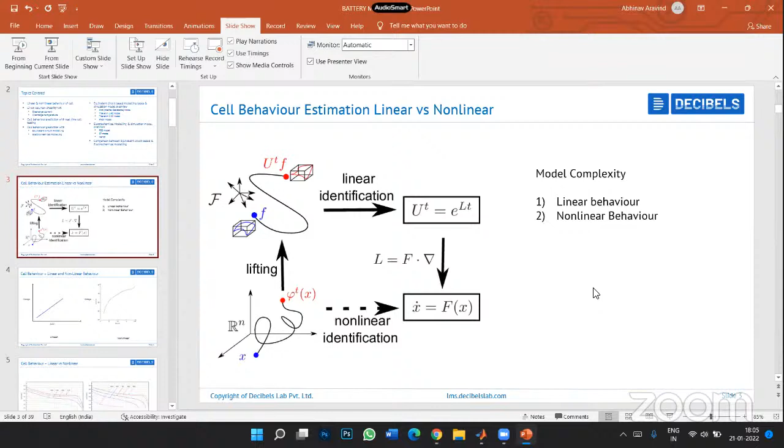So comparing these two, obviously we can say that it is more tough, more complex to have an in-depth understanding of the nonlinear behavior of the system, which requires some more complex modeling approaches.

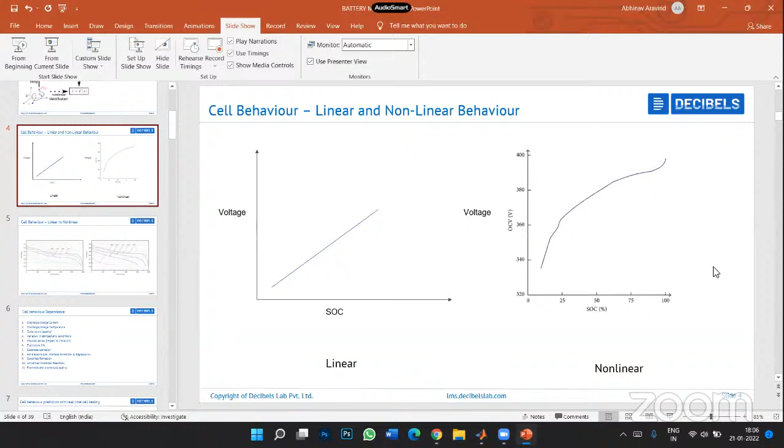Now, also taking into account some of the relationship between parameters and some of the other situations that we have, such as the effect of discharge and charging current and discharge and charging temperature on the chemical reactions that occur within the cell, and also when we try to analyze the cycle count. So cycle count is basically the charge and discharge cycle. So once you charge it and then discharge it, that's one complete cycle. So analyzing this and trying to see what effect it has on the chemical reactions within the cell is really important. It has to be accounted for when you're trying to analyze the complete behavior.

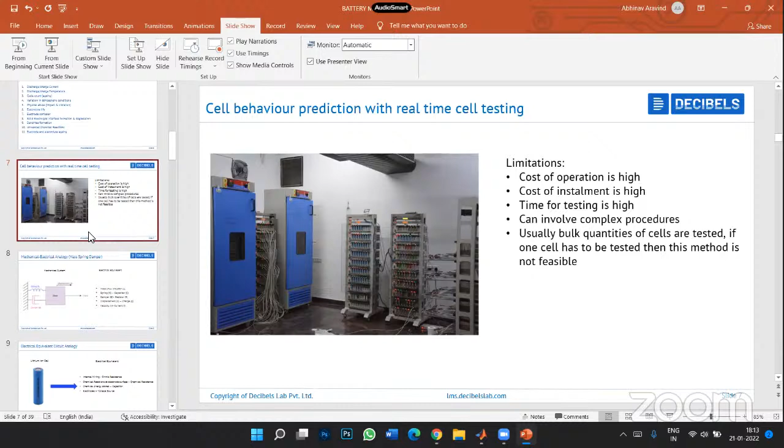So similar to this analogy, we can establish an analogy between the lithium-ion cell, the internal components of the lithium-ion cell, and its electrical equivalent. When we talk about the internal components, we start with internal wiring, which can be represented as an ohmic resistance. The chemical reactions that occur at the electrodes can be represented as chemical resistance. And then we have the chemical energy stored within the cell, and that can be represented as the capacitor.

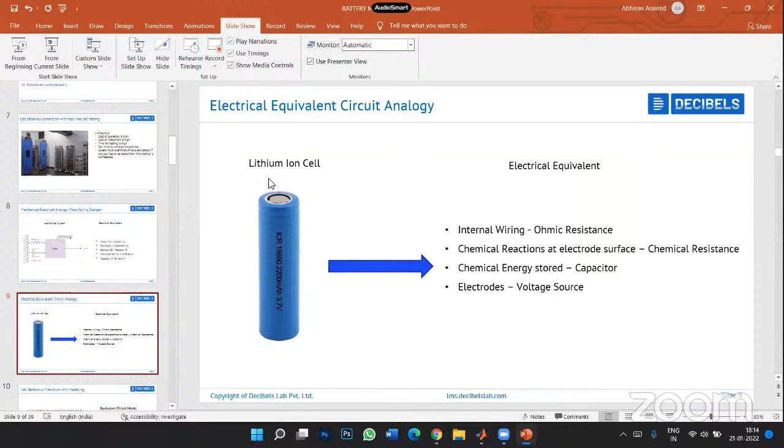And then we have the electrodes. The electrodes act as the voltage source or the voltage supply. So from this, we can get a basic understanding of how electrical equivalent modeling is done when we look at a lithium-ion cell.

So in the equivalent circuit part of the approach, I will be introducing the RINT model, also called the internal resistance model, and then the Thevenin 1 RC model, which is based on Thevenin's equivalent circuit approach.

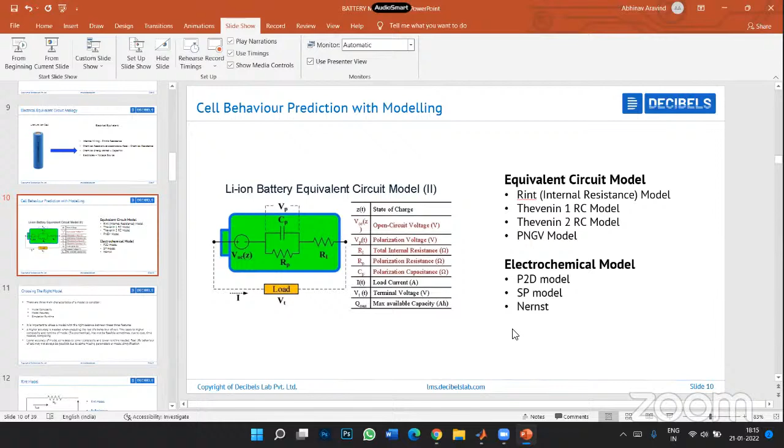Now, to understand how we approach this particular method, we first have to understand how we choose the right model for understanding the behavior of the cell. Whenever we try to choose a model, there are three characteristics that we have to consider. The first one is the model complexity, the second is the model accuracy, and the third is the simulation runtime. All three are interdependent, and it is very important to choose a model with a good balance between these three features.

So let's consider a scenario where you require a very high accuracy. Higher accuracy means that you're trying to represent the real-life behavior of the cell. So if you have high accuracy, your complexity also increases, and so does your simulation time.

That's the disadvantage: while it is very accurate, building the model and analyzing it becomes very complex, because the accuracy involves many equations and a lot of parameterization. It will also involve a lot of cost and time to build, and its complexity is very high. It may not be feasible in all situations, but the main advantage is that it can represent the actual real-life behavior of the cell.

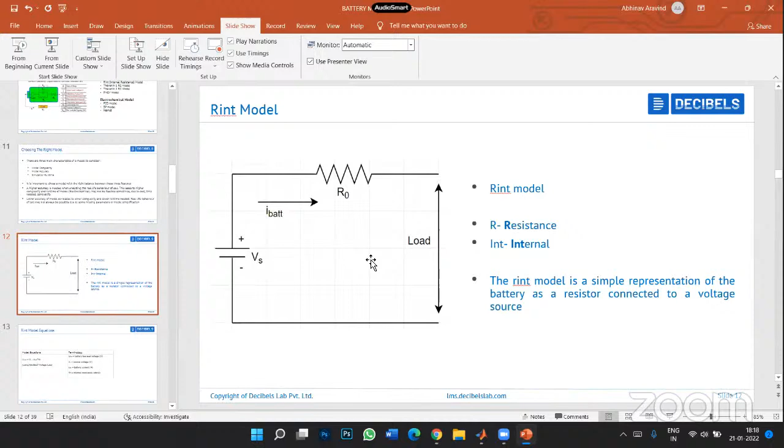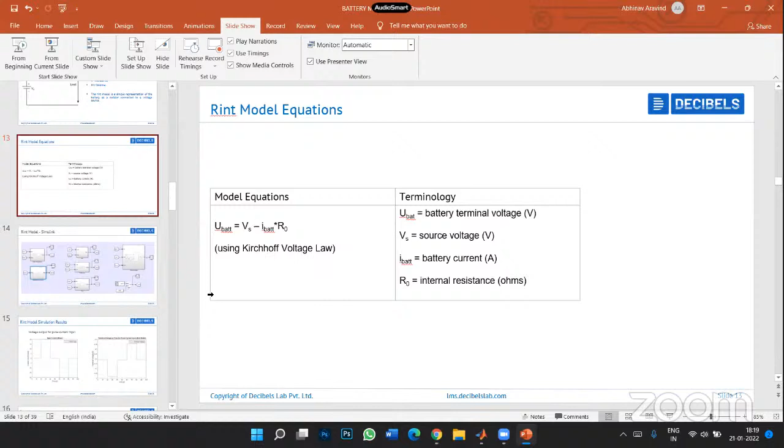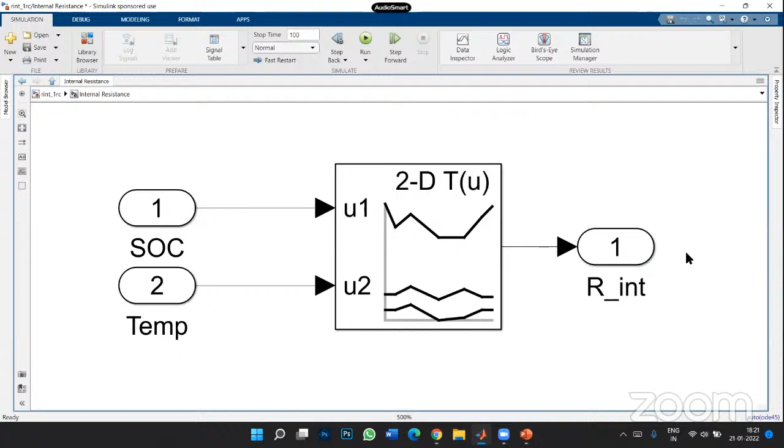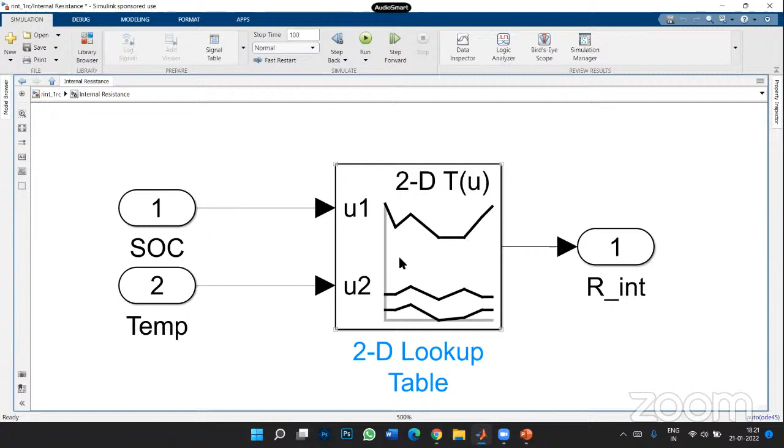When we go into the internal resistance block, here we have what is called a lookup table. The lookup table is basically a table used to establish a relationship between two parameters. For example, if I provide a parameter input here, then corresponding to it, I have an output parameter here. This kind of approach is what we call a data-driven approach. Using these lookup tables, we have modeled the complete relationship between all of the parameters, and then we are able to get the full behavior of the cell.

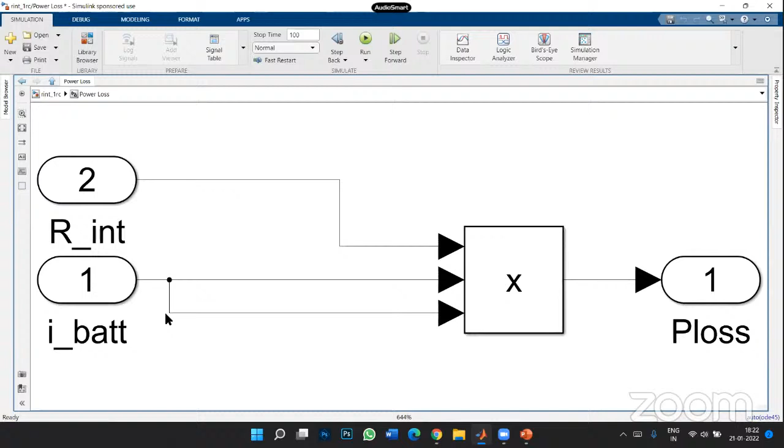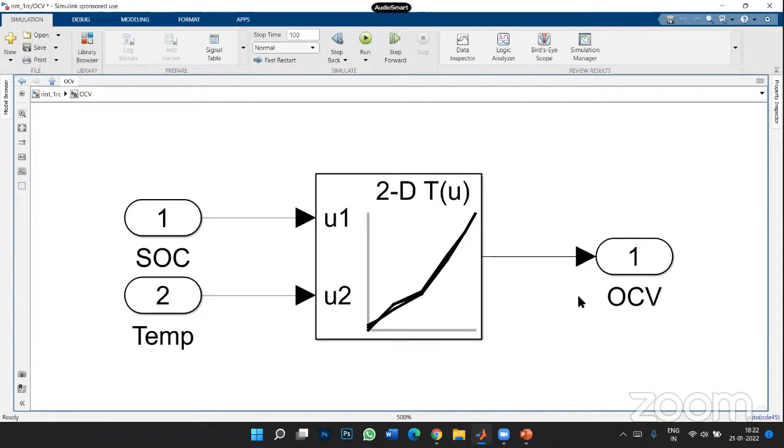Here we modeled the power loss based on the estimated internal resistance. The power loss is basically based on ohmic losses, I squared R, so we are able to estimate the power loss using the internal resistance. Then we also have the open circuit voltage, which is the main branch voltage of the entire circuit. Even in this case, we can see the use of a lookup table, with the inputs of temperature and the estimated state of charge, and the output as the open circuit voltage.

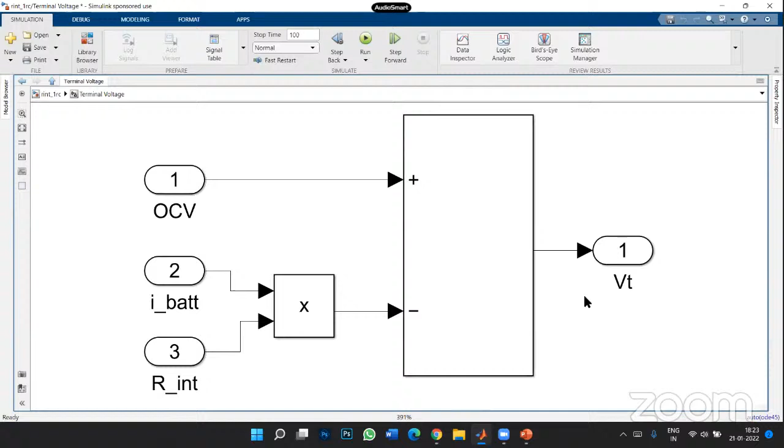And then finally, since all of these blocks are interrelated and interdependent, when we get the output from all of these blocks, we are able to establish the final equation of the terminal voltage, which is over here, which we derived using Kirchhoff's Voltage Law, as we had seen in the presentation. So the final output here is the circuit voltage, the terminal voltage we see here.

And on this part of the model, we can see the inputs that can be used. The entire model uses one input, which is the battery current, and has one output, which is the terminal voltage. So this is just a brief overview of the Simulink model of the RINT model.

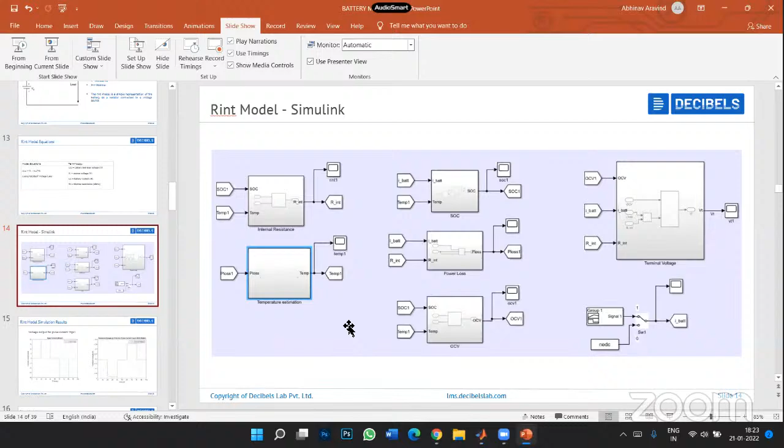And let's have a look at the results that we get when we perform a pulse current input to this. This pulse current input is basically just a simple discharge current and then a charge pulse current that we have given to the entire model. It's basically a linear input, a pulse charge and then a pulse discharge, just to see how the voltage would be at the terminals of the entire model.

Now when we discuss the advantages of this particular model, this is a simple and linear representation. It involves one equation that represents the entire system with very few variables, which means it's pretty simple to build this model using that one equation. So these are the main advantages, and the simulation time required is really low.

But the main disadvantage of this particular model is that it can only represent the linear behavior of the battery. It cannot be used for representing the nonlinear behavior, which leads to low accuracy in the final interpretation. And it also cannot be used in dynamic situations, because it's a linear representation. So that's a basic overview of the RINT model.

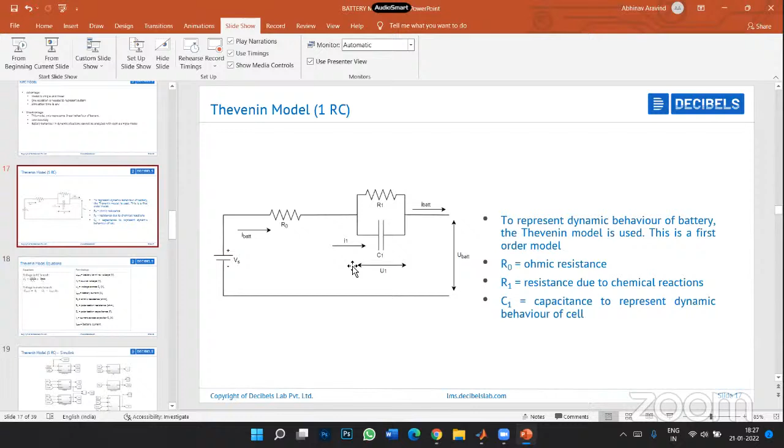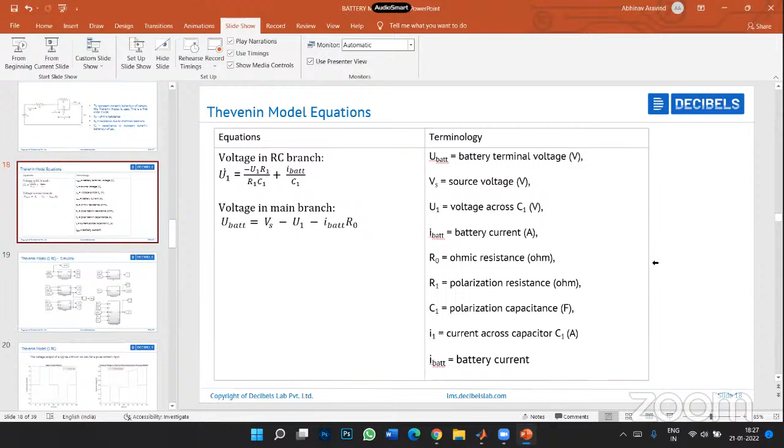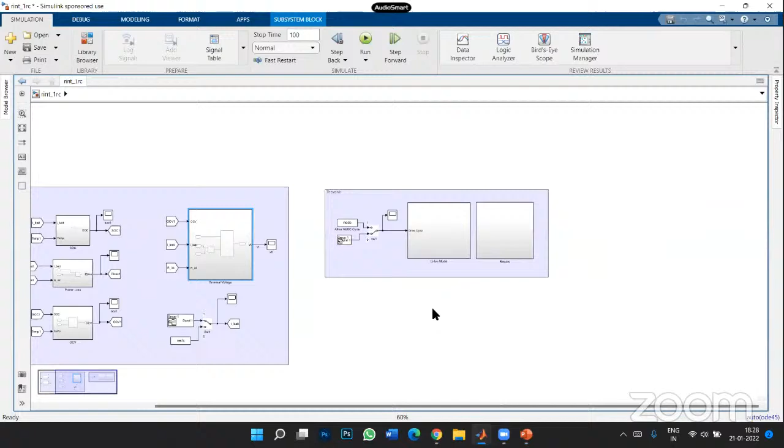And there is a model for this in Simulink. Let me show that in the Simulink environment. So this is the Thevenin model, 1RC model. Here we can see that it's a bit more complex, where we have established more complex relationships between each of the parameters to try to represent how it would behave in real life.

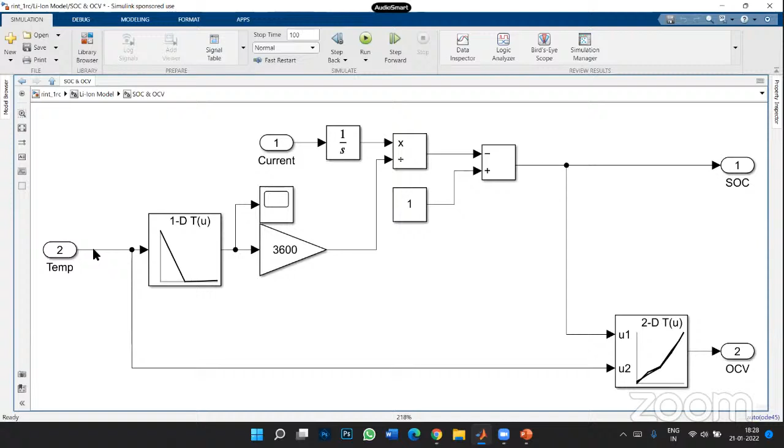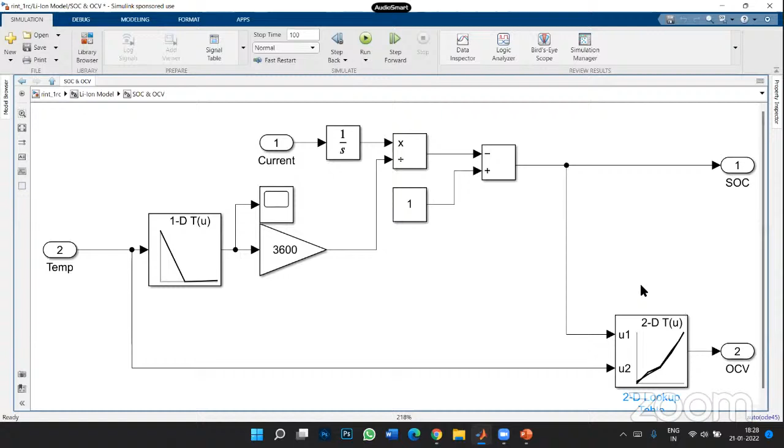For example, we can see here the more complex relationship between the temperature and the open circuit voltage. In the RINT model it's simpler, but in this one it's more complex, involving two or more parameters used for estimation of the behavior.

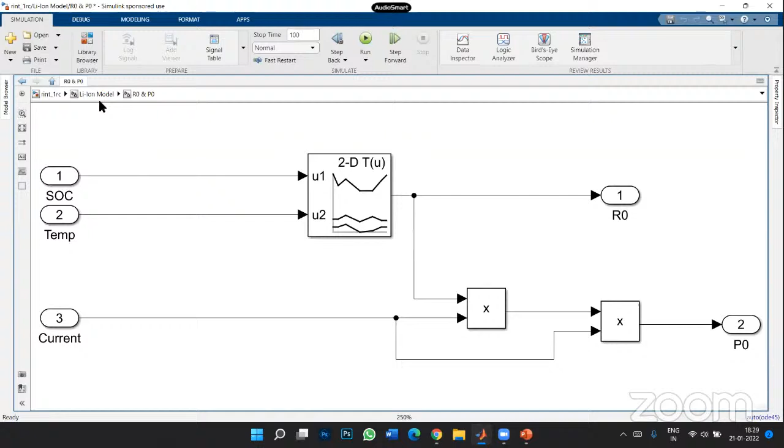And then here we have the estimation of the internal resistance, in a similar way to how we did it in the RINT model, but here we have a more dynamic situation happening within the lookup table, and we also have an additional resistance included here, which also influences the power loss.

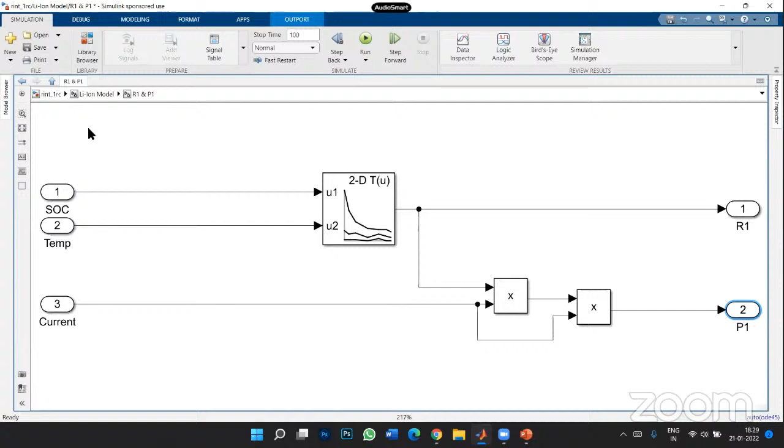So this particular resistance that you see over here, this R1, is nothing but the resistance due to the chemical reactions occurring within. So upon analyzing all of this particular resistance, and this chemical resistance, the total power loss actually increases, making this model more accurate in terms of real life representation. So this power loss would then, of course, directly influence the temperature and then also the losses within the cell.

And finally, using all of these estimated parameters, we can see here that the final terminal voltage is now also influenced by the voltage drop across the internal resistor as well as the chemical resistance. So all of this has a significant impact on the terminal voltage, which we will see in the results part of this model. So this is a brief overview of how the Simulink model is built of the 1RC model,

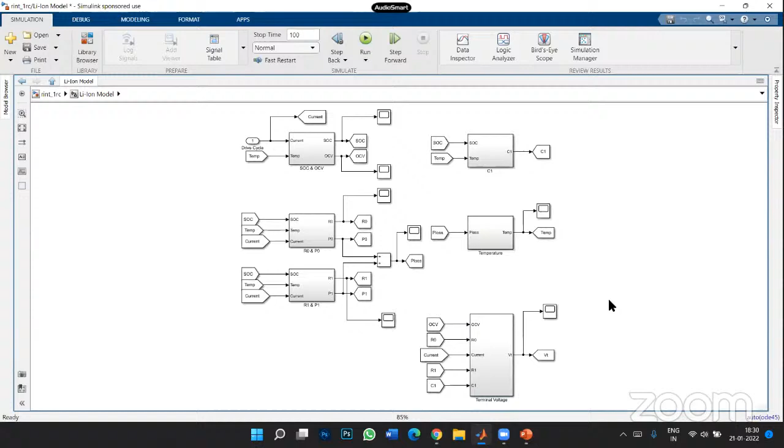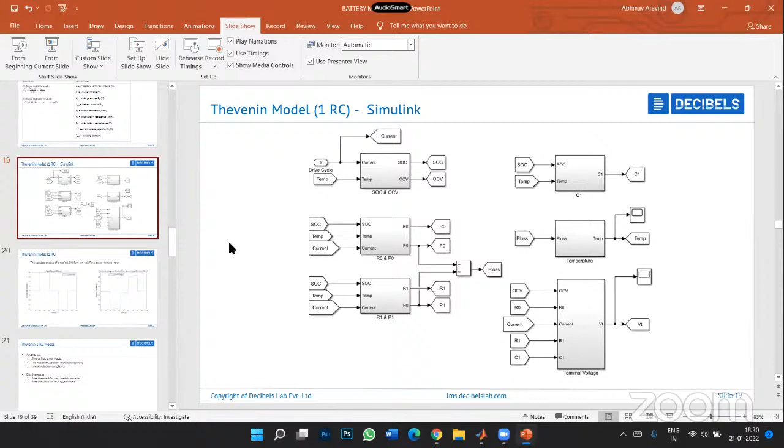So this is basically how we analyze the behavior of the Thevenin 1RC model. This can also be subjected to different kinds of input, not just the pulse input. It can be subjected to even a simple drive cycle input where we have varying current inputs. But we'll not be discussing that now because it's a little bit complex.

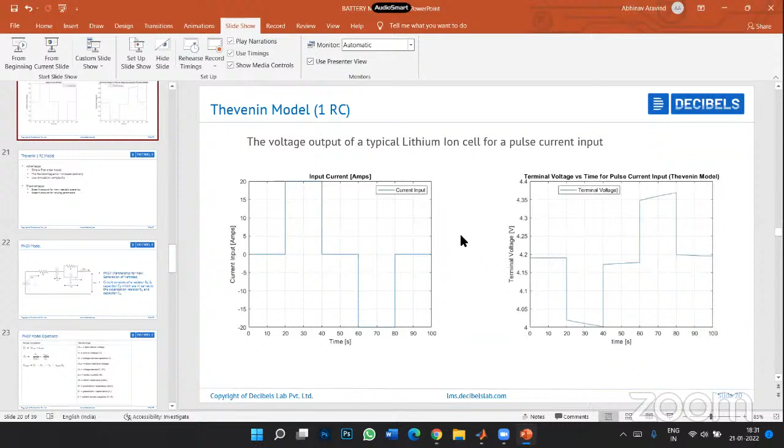So when we talk about the Thevenin 1RC model's advantages and disadvantages, we can say that this particular model is a simple first order model which uses two equations and some more variables. The resistor and capacitor branch, which is included in the circuit, increases the accuracy of the model, which we saw in the terminal voltage graph. It has a slightly increased complexity compared to the RINT model, but it is still relatively low, and this model is simple and easier to build.

But the disadvantage is that even though it considers some dynamic aspects, it does not account for so many other varying parameters such as cell aging, or electrolyte aging, or self-discharge, things like voltage loss due to electrolyte aging and other unwanted side reactions that occur within the cell.

So the conclusion between the first two models, the RINT model and the Thevenin 1RC model, is that the 1RC model is a bit more accurate. It is a bit more realistic, but it can use some additional improvements over the considered modeling approach. So of course there are some other improvements made to this to counter the low accuracy. So the next one would be what we call the PNGV model, and the PNGV model is basically a much more advanced version of the Thevenin 1RC model.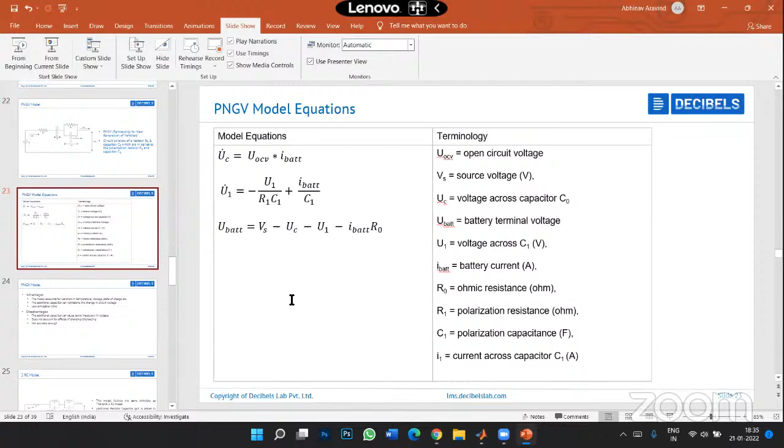This is currently being researched. We are still building this particular model. We have yet to progress on this. So here we can talk about the advantages and disadvantages of using this model.

Unlike the Thevenin 1RC model, this model actually accounts for certain variation in parameters, for example, variation in temperature, variation in the state of charge, voltage, even to a certain extent the electrolyte life can be modeled in this, and you can show the slow degradation of that particular parameter. The additional capacitor can show the change in the overall circuit voltage in this particular model.

This is, I would say, a low to medium simulation time. It is slightly higher than that of the Thevenin 1RC. But on the disadvantages, the additional capacitor that is used in this model can actually cause some inaccuracy in voltage readings. If you look at an electrical circuit, you have a capacitor which acts as a filter, and the filter can change the readings in the voltage to a certain extent. So that can cause some accuracy errors within the circuit.

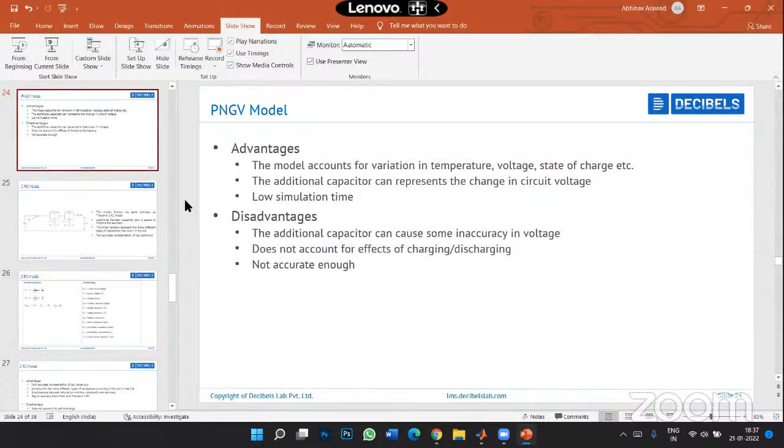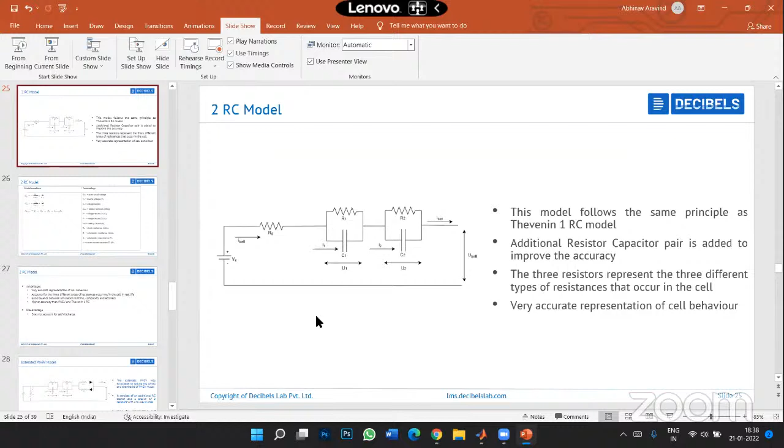Here at Decibels Lab, we're currently working on this particular model. We aim to complete this model and have a good and realistic analysis of the cell behavior in real life using this approach, considering that this model is fairly accurate.

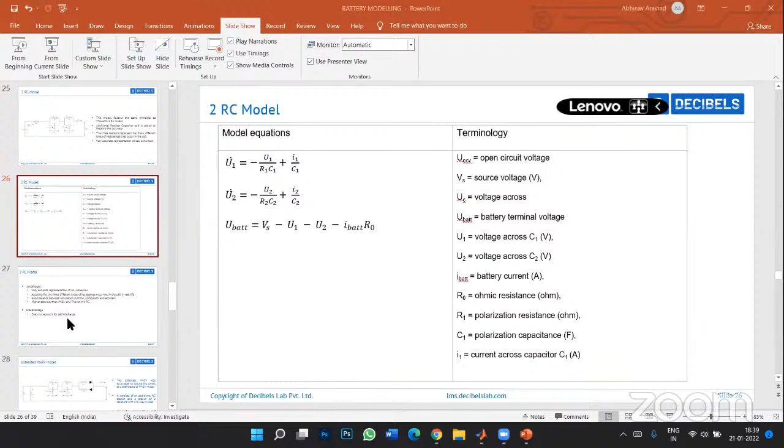Moving on to the advantages and disadvantages, it has a lot of advantages: it can very accurately represent the realistic behavior of the cell. As I explained, it can account for three major types of resistances within the cell. One is the internal or ohmic resistance, resistance due to the wiring. The second is the resistance due to the chemical reactions at the electrodes, the anode and the cathode. The third is the resistance due to ion exchange between the electrodes. This model includes all three phenomena, which makes it a very good balance between complexity, accuracy, and simulation runtime.

When you compare this to the PNGV model and the 1RC model, this makes it a very good choice for going ahead with the cell model. It has very few disadvantages. One is that it does not account for a phenomenon called self-discharge, which each cell has.

One good example to understand self-discharge: if you charge your mobile phone to, let's say, 90%, and leave it overnight, the next morning the percentage has dropped. It would be showing something like 87, 88, or 85 percent. That self-discharge occurs in almost all cells.

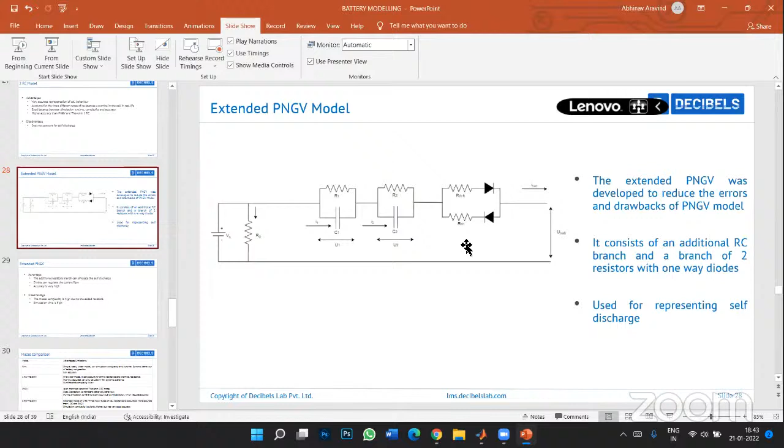which means that this model is not usually preferred. It is quite accurate, and it can actually represent a lot of dynamic behavior of the cell in real life. But it will not be feasible to build this model in real life because it's not really practical to use this particular approach. So while the advantage is that it can simulate self-discharge and certain other varying parameters, and it can represent very close to real life behavior,

the added resistors and the influence of the self-discharge can actually increase the model complexity because it's a highly nonlinear model, and parameter estimation and developing relationships between all the parameters within this particular model is kind of complex. It takes a lot of analysis and a lot of time to establish all of the relationships and to understand the complete behavior. So that also would mean that the simulation runtime is quite high, which is not preferred. So overall, this particular model is not really a practical model, despite it having a very high level of accuracy.

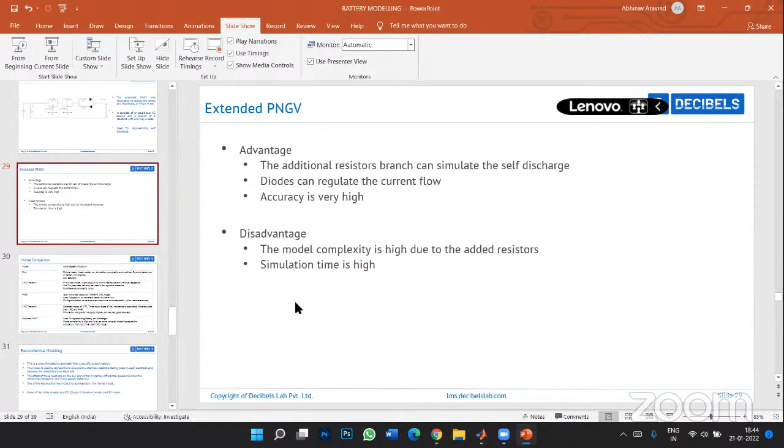So when we come to the conclusion between all of these models, we can just have a brief look. So the Rint model, 1RC PNGV, 2RC model, and then finally the extended PNGV model. So the Rint is just a simple, basic, and linear representation, and it cannot be used for dynamic behavior and for nonlinear behavior, which means it can't be used for real-life analysis.

In order to counter that, the 1RC Thevenin model was developed. So basically, this model has an extra resistor and a capacitor to represent the chemical reactions occurring within the cell. So that chemical reaction can be modeled as a resistor, and that particular resistor adds to the actual cell degradation, and you can see the effect of it on the cell parameters when you subject it to different tests. It is accurate to a certain extent, but cannot be used in certain dynamic scenarios. It too is facing the same drawback.

So the PNGV model is an improved version of the previous version, the 1RC model. It uses an extra capacitor to represent more accurate and dynamic behavior. But the drawback is that during simulation, the voltage that will be finally shown at the terminal of the battery will not be accurate because of this capacitor. It can cause some errors, which can actually reduce the accuracy of the battery finally.

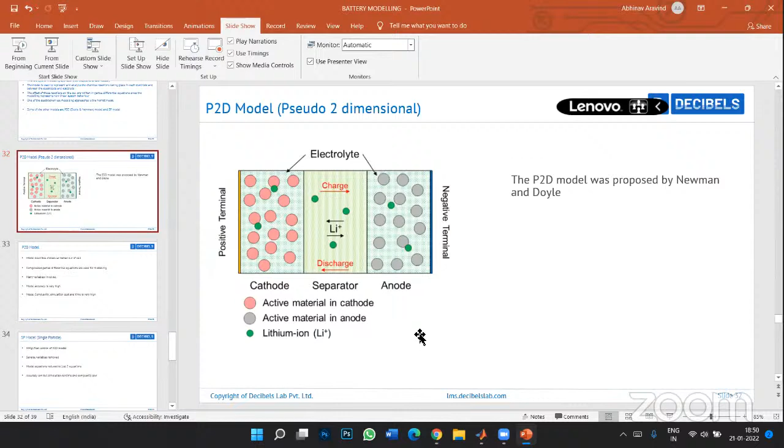The involvement of these complicated partial differential equations can increase the model complexity. But because of this, we're able to understand the complete molecular behavior of the cell. We're able to model its aging, cell degradation, self-discharge, the effect of temperature, the effect of side reactions, unwanted chemical involvements, and something called dendritic growth, which occurs when the electrolyte is not able to conduct ions anymore. All of this nonlinear behavior can be modeled using the P2D model.

The P2D model is a very complicated approach because it involves a lot of equations. Many variables are involved, but it gives very highly accurate results. This can be used for research purposes, but it cannot actually be implemented in a real-life cell because it's simply too complex.

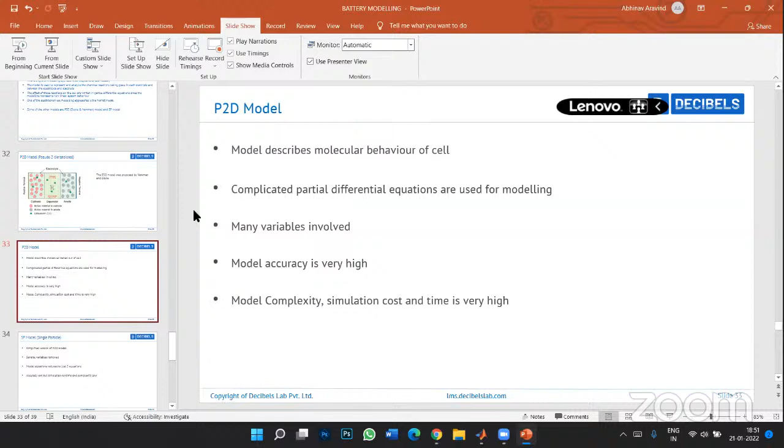To simplify the P2D model, another model was introduced, called the SP model, the single particle model. The several variables and equations used in the P2D model are eliminated in this model, simplifying the entire model to a set of just two equations, which makes the model very simple to understand.

Consequently, the accuracy also reduces, which is a trade-off that has to be taken into account. Either you have a highly complex model with high accuracy, or a low complexity, low accuracy model, but with a low simulation time as well. All in all, the SP model is a simplified version of the P2D model. It is still a complex approach, but much simpler than the P2D model.